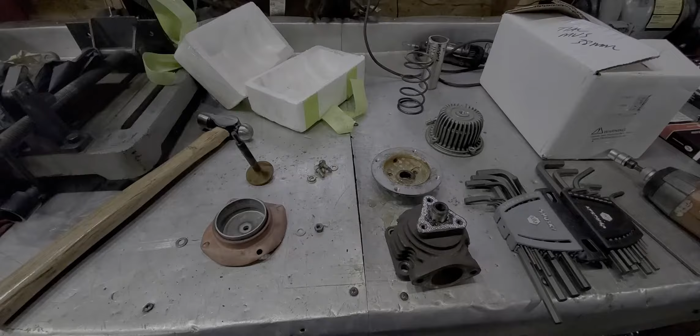Okay, guys, update time. Well, you know, as with any of these kinds of projects, things are going to come up. You think you're on a roll, you think you're about to really get rolling, and you're almost there, and pow, there's something. So, as most of you may know, when your car's running, if you watch at the back of your car, you'll see drops of water.

Some of you might even have noticed how there's a hole drilled into your stock muffler, and that's there to drip out condensate that happens when you first start your car. Now, as your exhaust heats up, that condensate becomes less and less, and of course, it's gone. But the hole's there to keep the water from corroding and rusting and stuff like that. Well, with the rear mount turbo setup, you face that issue. However, it shouldn't be that big of an issue.

Okay, so in my case, though, I'm using a wastegate, an HKS original wastegate 38 millimeter from the kit that I put this on back when I went to Spring Hill, Tennessee in 1999 for the performance rally. So it's old per se. It didn't have a whole lot of usage on it. That's why I used it for this deal. My last turbo kit, that little T25, I was just using the internal wastegate with the actuator. But of course here, a little bit different animal.

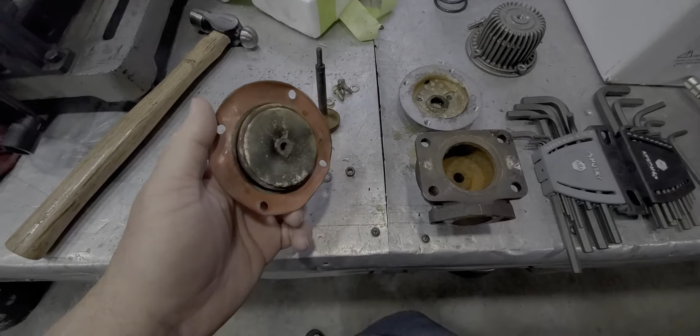There were a couple people that said, oh, yeah, until it heats up, you'll have some pass by, blow by, and stuff like that. But then when the valve gets hot, it'll expand and seal it off. Well, after it got warmed up, I had my son get in there and rev the engine, and the flow through there is as if there's no seal. So I was going to pull the valve, take a look at it. A lot of times what'll happen is these things will just seep by. You got to pull these things apart and check the diaphragm and all that.

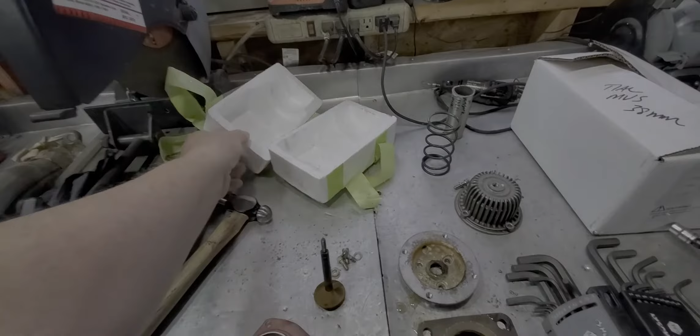And I had purchased a Chinese wastegate, and the only reason I did that, I didn't even intend to use it. I was going to use this one, but I needed the flange out of there that bolts up to this flange, and it has the ring on it, that cup that sits on it. And so I believe what's ended up here is I've once again been bitten by Chinese crap.

So if you folks are Chinese watching this and you got any relatives in the business over there in China making this stuff, man, tell them to take just a bit more time and a little bit more pride in their work and make something that works. I mean, it can't be that much more expensive. Some of these valves and stuff look identical. You really got to spend some time to figure out what's fake or not.

So I just don't get how you can commit that much time to making something, the production process, and it not just be right. Because in the end, word gets out, videos like this time and time again are going to expose it, and you can offer a $60 wastegate. Nobody's going to buy it. Over time, you just get burnt so many times and you waste time, and in some instances you may hurt your motor on some parts that they have.

But anyway, I'm not going to beat up on the Chinese. I actually love Asian people, love Asian culture, and at one time wanted to learn Chinese. I think it's a beautiful language. But anyway, so much for that.

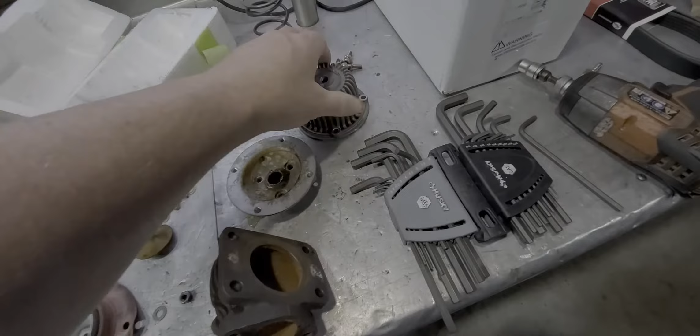This port right here, the bottom port, is the one that I had hooked up. When I took it off, water literally came jetting out. And after I unbolted this thing from the flange and turned it over, again, water just comes pouring out of there. That rusty water. As a matter of fact, when I just disassembled this, all this water came out of here still, even though I thought I had gotten it all out. And you can see the moisture inside there.

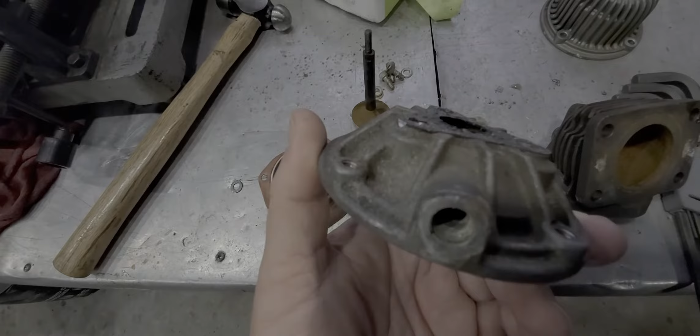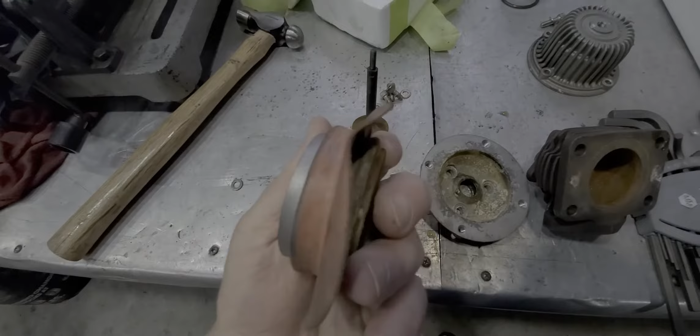I'm looking in here, and I don't see any kind of seal on here. So moisture gets inside there. If it can get inside there, it's going to get in that port right there. That's where the air would get in at. Air comes up through here, pushes up underneath here, and of course the spring is in here, and it has the hat compressed down onto it, and this lifts off the seat that's here, and that's how you get your wastegate to open and vent.

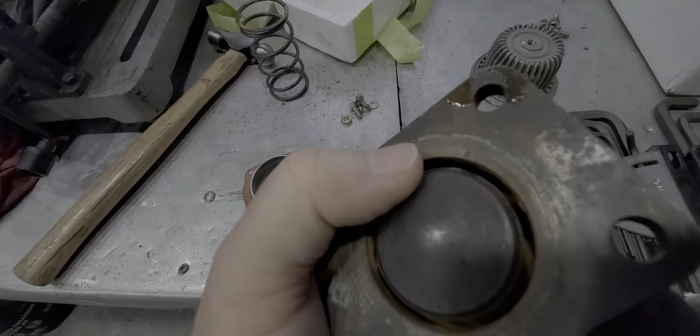So in the end, with that being full of water, that's not good. And plus, the main problem was this thing was not sealing up inside here. When it came closed like this, see the gap in here? That gap is filled by that ring from the flange that I bought. And so it's just not sealing right. So it's passing by.

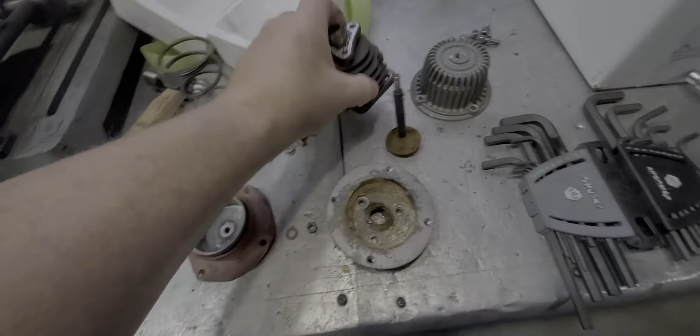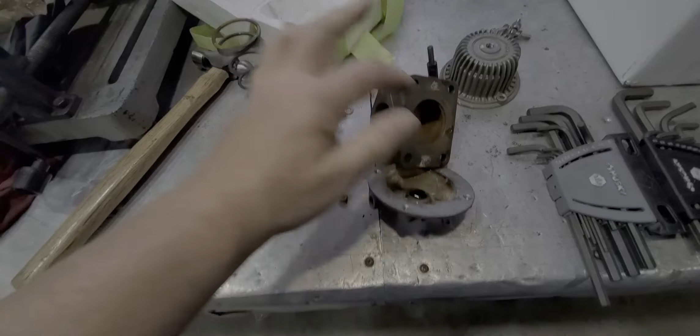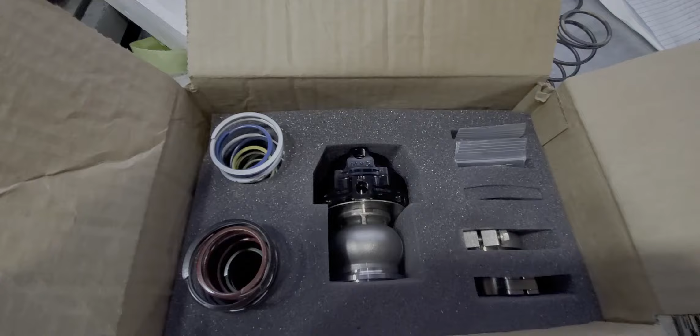That ain't gonna work. I seriously doubt that the water failed this. The water got inside here, and you can see it's all rusted inside here. The water got inside here because this thing wasn't sealing. Had that water not got inside here, it wouldn't have passed through here to get into here. So, need a new wastegate. What do you do? Well, you end up buying a new wastegate.

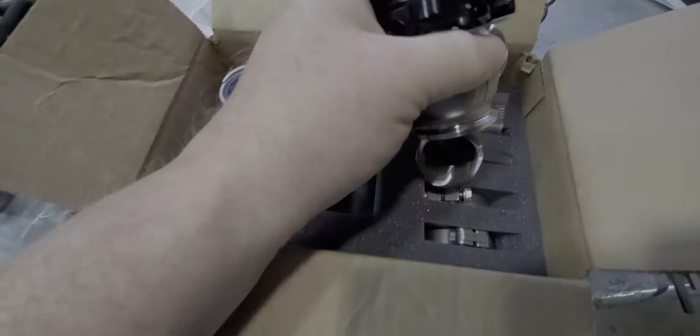So this time around, HKS, like I said, outside of using internal wastegates and the diaphragms for the actuators, that other one is the only one I had really used. And Tial is a great company, but again, like my video on blow-off valves, that HKS blow-off valve, there's so many fakes out there, and they look so real.

And again, I'm going to rant on the Chinese again. You sorry suckers, have some integrity, some pride in what you do. If you're going to steal something from somebody, make it better or at least the same. How cheesy you people are for doing this. But anyway, I say you people and I say Chinese, but obviously if you don't make parts, if you don't do stuff like this, it doesn't pertain to you.

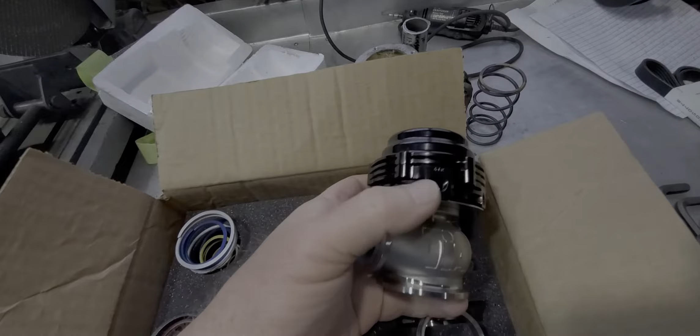But you've got to understand, this costs people, even though it's 60, 70, 80, 120 bucks. There are some people on the internet that run speed shops that will sell these things for $200, and you really think because you're paying the money you're getting a real one, and you get one of those fake pieces of junk. It's really flooded the market with trash.

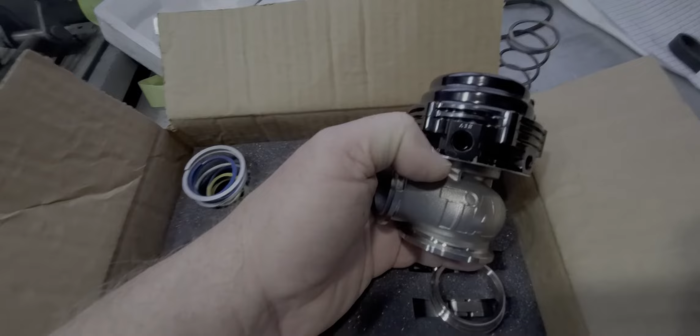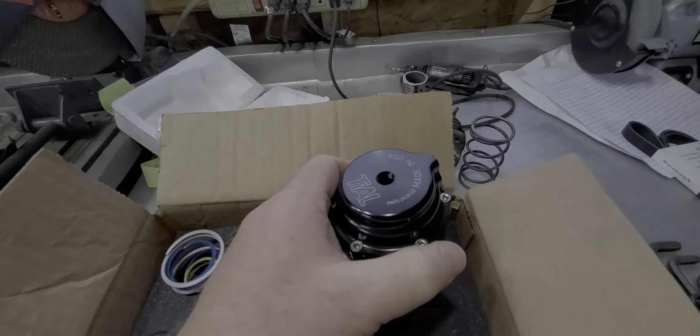So it's just frustrating. Out of an abundance of caution, I had to go online, looked at YouTube video after YouTube video, and found a young lady who's into racing, and she did an excellent job pointing out all the keys that you could look at to determine whether it was fake or not. I mean, they go to the hassle of making that. They put all the ports where they need to be. It's so jacked up how close they try to make these things.

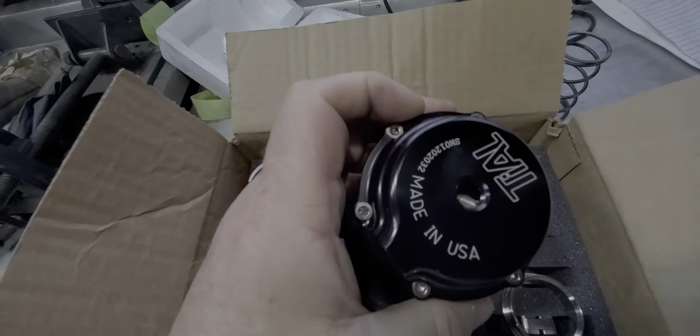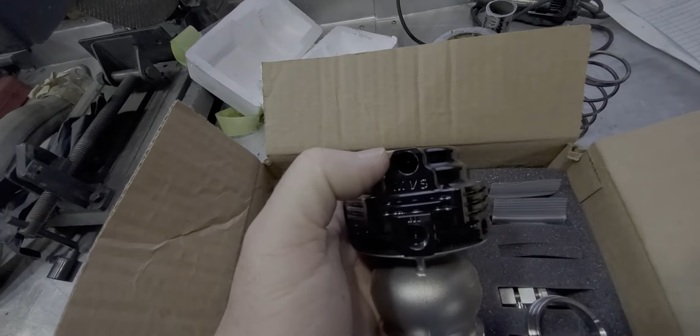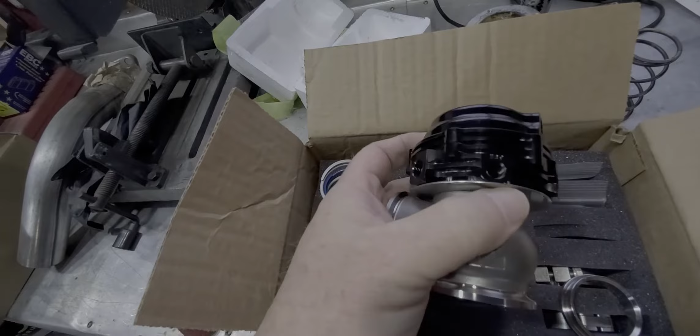But anyway, there's a few key things that you can see right here. This port right here, most of them come down just straight. This has like a hump shoulder on either side here. Each one of these has writing inscribed on all the ports. This one, if you wanted to, you could run coolant through here, which they said for most applications you don't need to do. Race application, yeah, but not street.

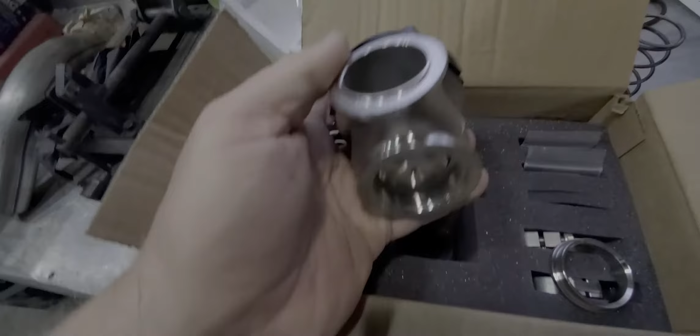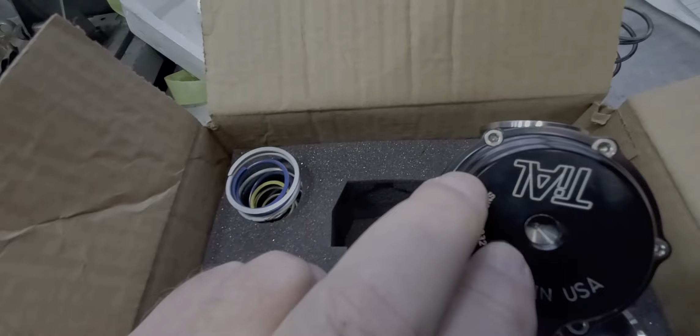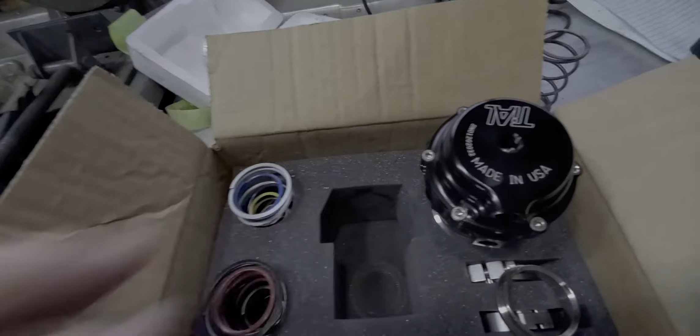This portion here, the way that it's shaped, it's got that flat on it with a hole in the middle. Inside here, if I cared to take this thing apart, there's a button underneath this cap in the center. It has a rounded dome top with a notch in it. You can see that part that I'm talking about inside here. You just can't see the rounded dome portion. It's got like a notch in it. The other ones don't. So I'm not going to bore you with all that stuff, but just do your due diligence and take a few extra steps.

This is from jegs.com, and here's the funny part. Jegs.com and all their pictures, because this is a real key right here in determining whether it's a fake or not. As it stands right now, hell, the Chinese may be watching those same videos and change their game. You never know. But for right now, all of Jegs' pictures had the picture facing this way. So you can see the top portion of this, but you can't see the part that's important.

And it looked like file photos that were pulled right off of eBay. And so, yes, you did see this, made in USA Tial. So I was apprehensive that, yeah, I was going to get screwed, but it's from Jegs. They would take it back, no problem, and maybe just do some feedback. They'd stop carrying them or do their diligence on their side to make sure they didn't buy junk. But anyway, I got it from jegs.com.

I think these normally go every day for like $305. For whatever reason, Jegs was having a sale the day I bought this one, and it was $50 less. I walked out with this one for $250. And it was black. They didn't offer it in any other colors. Oh, I'm sorry, they did offer it, but it was more. So the black, maybe nobody wants them. They're not pretty enough or shiny. But anyway, I got this.

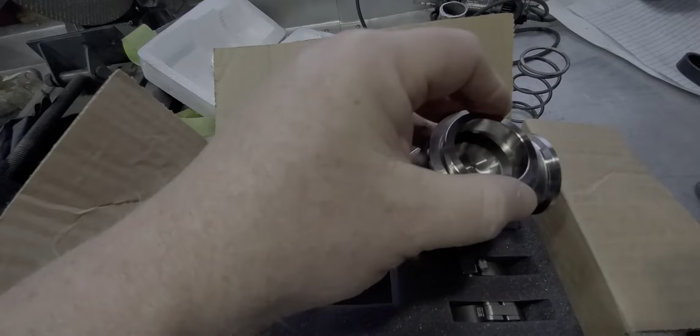Now I think you can get this, and it may be a little bit cheaper, but it's only going to come with this with maybe a couple springs. This comes with this all-important seat, which is what was the issue with the other one. A good quality piece. Of course, that's going to seal up in here. Nice and tight fit. Obviously you don't weld it inside there. It sits up just enough above that lip, so when you set it, it actually makes the other side of these V-band clamps.

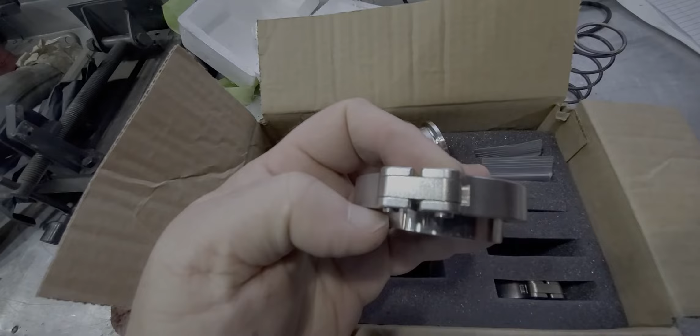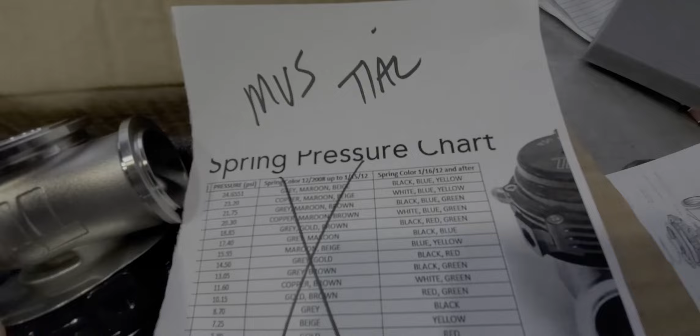Okay, the fake ones also have real crummy, cheesy V-band clamps. These are good quality ones. It comes with all the springs that you need for the varying spring pressures. Now, I did have to go online and hunt for the guide. This is an MVS, they call it. It is a 38 millimeter.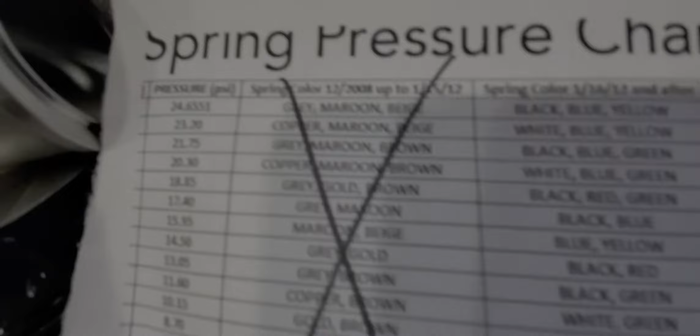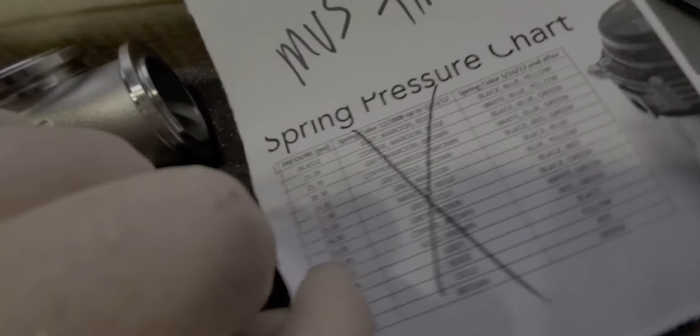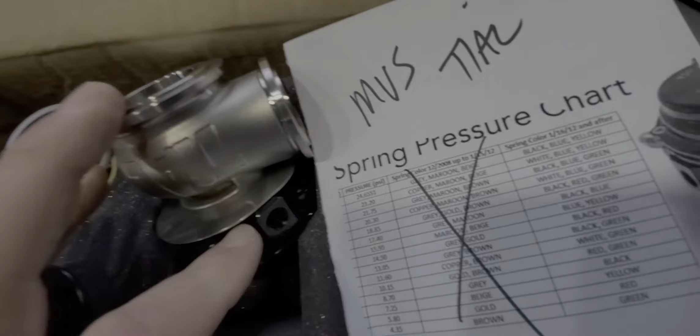But as you can see, it goes through and it tells you spring colors, 1/16/12 and after, and here's your pressure that you're wanting to run. It'll go as low as 4 psi and as high as 24. But I don't know if this was just a generic chart, because I can't imagine running 24 pounds of boost through a 38 mil. I mean, I don't know. I guess you could. It seems like it wouldn't be able to flow enough naturally. So anyway, I did that.

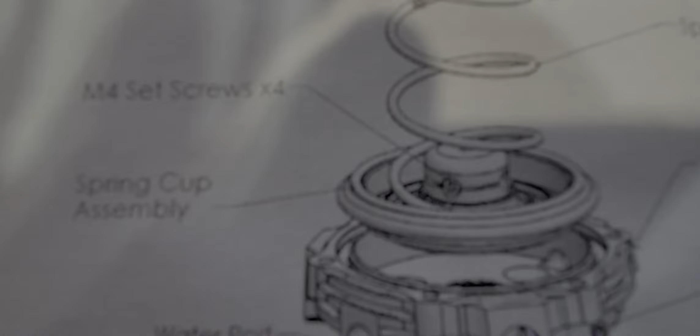It does come with this, and of course it's just an exploded view. While we're at it, do you see that button right there where it says spring cup assembly? That button right in the center of the spring, that's how that button should look. Apparently that's something that the Chinese just don't know how to do. But it's good because you can open yours up if there's a question of whether it's a fake or not, and check yours to see if it's right.

But anyway, exploded view here of it, MVR, MVS instructions. And back here, in case you don't know how to hook it up, there's a little drawing here for you to reference to figure it out. And it's just my Jegs receipt here, or my packing slip. But anyway, going with the Tial. I'll have this put on here probably by end of today.

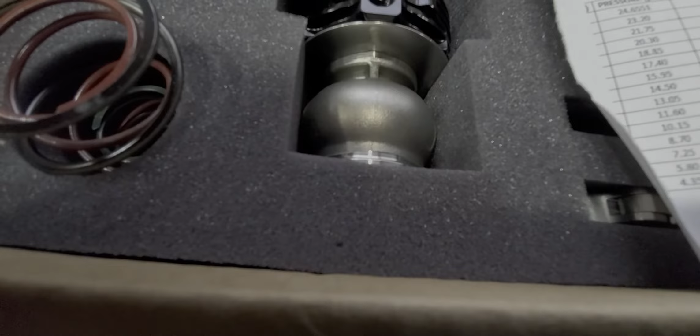And I'm thinking about using, from the start I had only wanted to run about maybe max 14 pounds because the head gasket on this build is just a stock head gasket. The metal head gasket, at the time I built this particular engine, I didn't have one available to me. Obviously later I'd hoped to do that. I'm in talks with Unichip right now for several things, and I'll update you on that here in just a second.

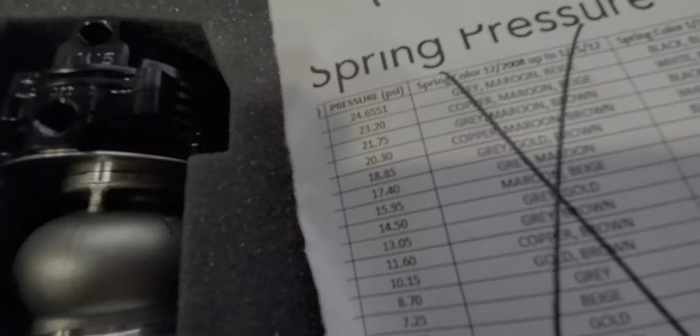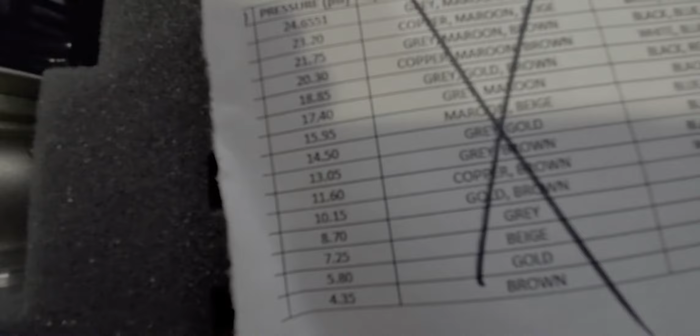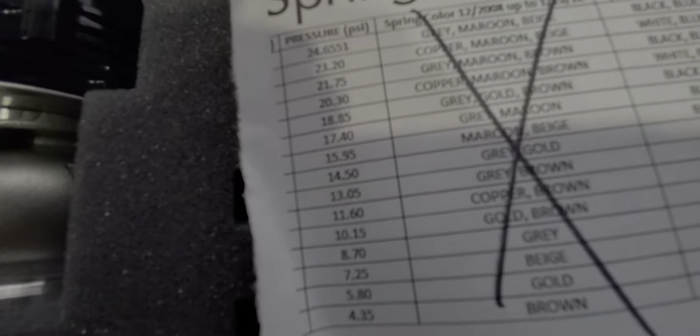But I'm just going to run 14 pounds, and so if that's the case, then I may just go 7 or 10, and then use the Grimspeed boost controller to get me up higher. I'm not sure what's the better way to do that. I don't know if you figure you're going to run 11 pounds, 12 pounds, to just put in the 11 pound or 13 pound spring and let it vent on its own, because as you know, these gates start to open before you hit that max boost, unless you use the top port on the wastegate.

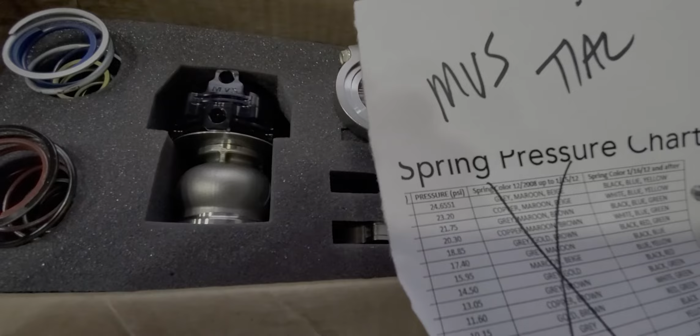So I'll figure that out, and I'm gonna go over all this stuff when I get it done and get this thing out and running, and tell you what I did and how the response is. And I may ultimately go, I have an electronic boost controller from way back. I mean, it's brand new in the box. I may use that, but the Unichip, I'll talk to you about that here in a second.

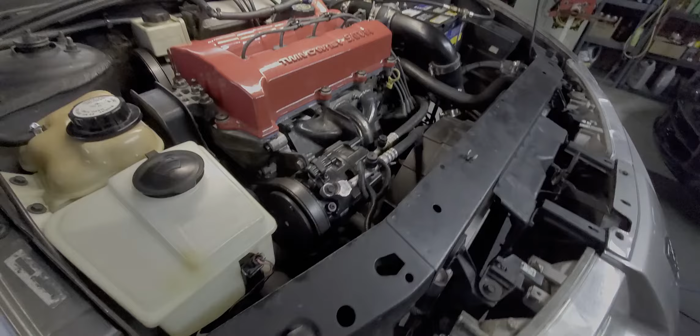But first, little quick thing here we're going to do. The power steering pump's not working. I have an extra one here. I just need to swap it out. I'll probably end up doing that today. So when I do that though, obviously you take the belt off.

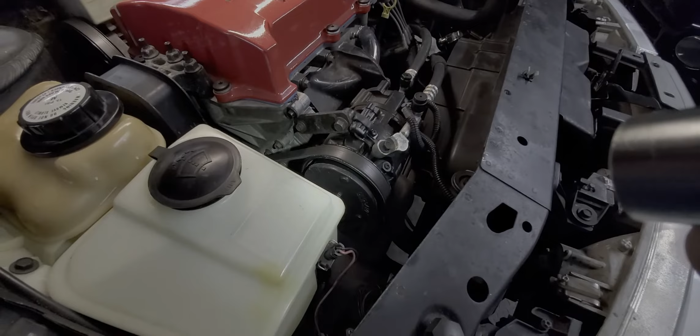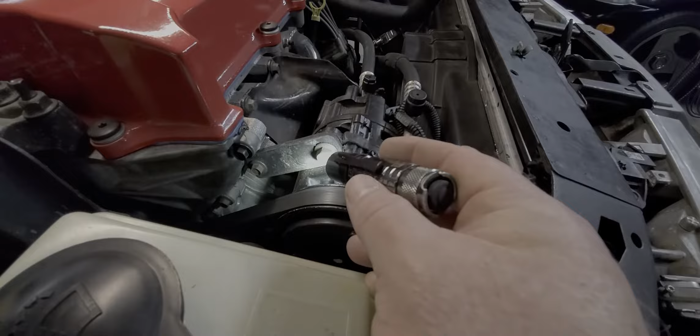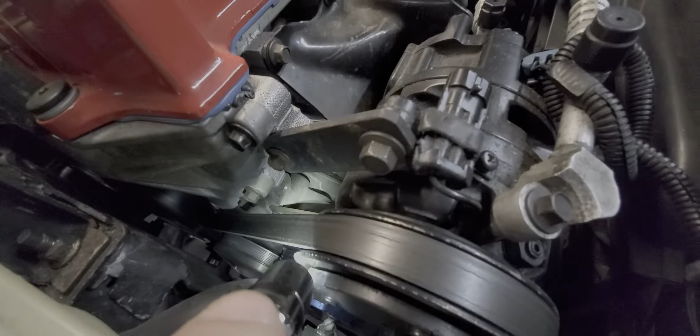This belt's chirping quite a bit when I start it up. When I had the other turbo kit up here, the way the manifold was and so forth, I had to kind of come up with a different mounting system. So the stock flange or the stock bracket, I had to replace with this. And so this is just a bracket that goes from here to here. And then there's another one that I'll point the light at, and you can see it. It's the bottom one. I don't know if you can see that or not, but it goes from there up to the compressor. So that replaces the stock bracket that was here.

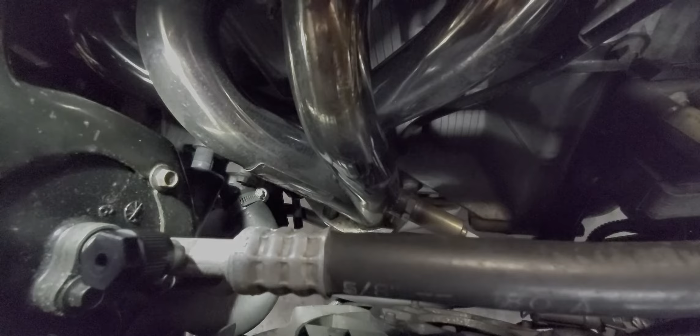I use the factory bracket here, but where it secures to the block down here, you can see, where is she at here? Let me get a camera the best way I can get in there. But I've got some bushings down in there that you may not be able to see. There they are, right there. In between the bracket and the block, there's a couple bushings on both sides, only on the bottom. Up here on the top, it bolts directly to the head.

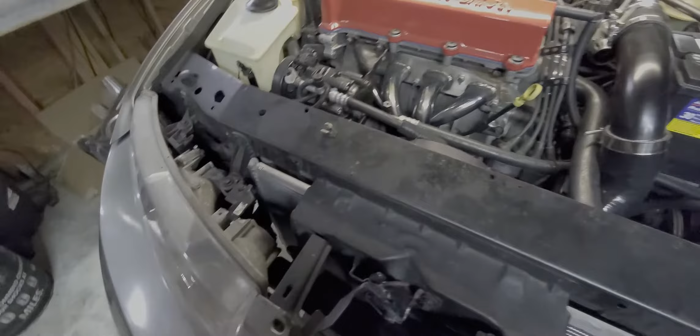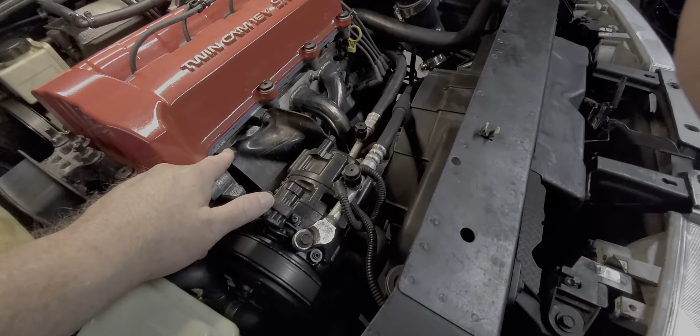So that there enabled me to gap or space this bracket here away from my turbo kit that I had up here. And all I had to do at that point was find the appropriate length belt. It actually required me to buy a 6-rib, and I cut the 6th rib off. But back then I had this one also bushinged, and so that pushed the compressor even further out. So that's why I had to use the 6-rib. Well, they had a 5-rib that was long enough, but just a hair too long. So on startups, it'll chirp until it gets hot, and then it'll warm up and expand and stop.

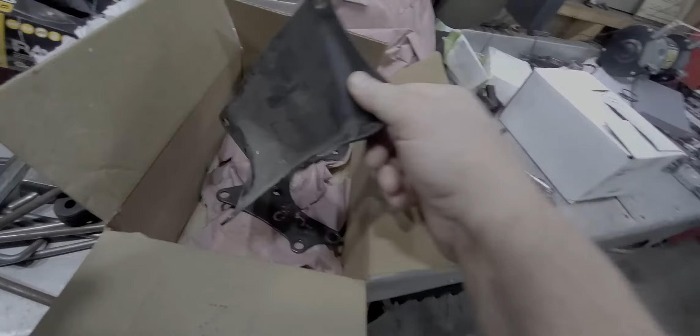So now that this thing is rear mount, I don't need this bracket, this bracket space. And so I'll go ahead and pull it off. But wouldn't you know, I don't know where my brackets are at, so I had to get some off of eBay. And good news is these aren't Chinese. Now I didn't need this one, but just in case in the future I went ahead and got it. But this is the one that I needed. So once I put this one back on, I'll be able to put the stock belt on, which I have. And in case you want a quick part number for it, stock belt is a K050778.

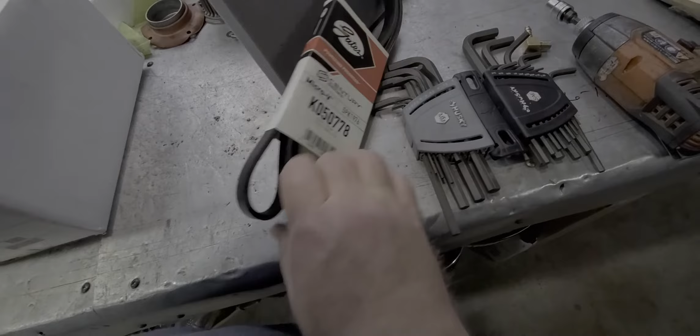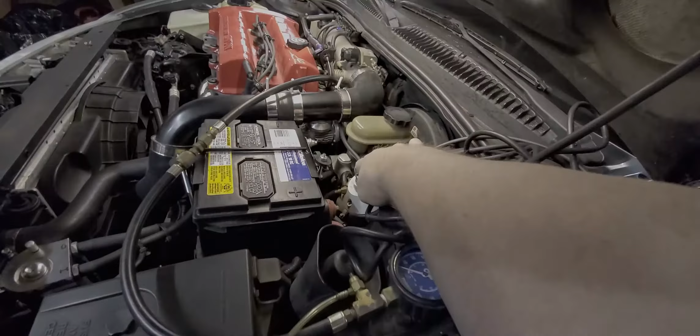That's a quick update, just to let you know what's stymieing progress right now. So hopefully I'll get these things hammered out pretty quick, and then the goal is to get it over to the little school parking lot over here and play with tuning this fuel pressure regulator, because this is what I'm going to use to initially drive it around and break it in while I'm doing the final things with the Unichip to get it set up to be installed. The Unichip's been posing a small issue because the wiring for it to identify like crank signal for the timing and all that stuff, they want you to use an oscilloscope. You have to locate 12 volts, but it isn't what you think. No time to explain that now. But those are the only two hiccups I see to installing this thing.

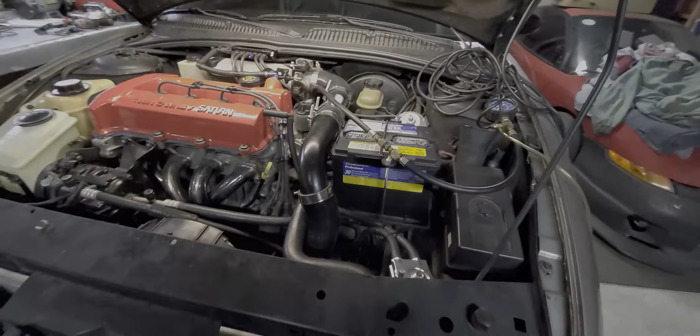The tuning process, I've been going over the manual quite a bit. It looks, man, I'm excited, actually. It's very easy to understand. And once I get really up on it, if anybody's interested in it and you're close by, I'll install it for you and we can even do a street tune on it. And then the final tune, you can go and get it tuned at a regular dyno place. But there's another market that I'm interested in getting into, and I'm not going to say anything about that yet. But that one will probably be a little bit more lucrative.

But anyway, for those that want it, I'll be here for the Saturns, and there's just been some changes in the Unichip US vendor, and I haven't been able to contact him. Turns out that guy retired. Someone else has stepped in, so I'm getting up to speed with them. But anyway, I hope to be able to offer you guys, but then also this other make. And I think in order to be a Unichip dealer, you can't just limit yourself to 2 makes of cars. So I don't know if I'll be a dealer or maybe just a seller.

Maybe I can install it, especially if you get really good at doing it on 2 makes of cars. It'll go extra fast, precise. There won't be any downtime because automatically you know which wires to tap into. So there may be something there, but if not, it was for myself in the beginning anyway, and that's what it'll be. But another update on that rear exhaust, getting that wastegate installed, and I'll update you again shortly.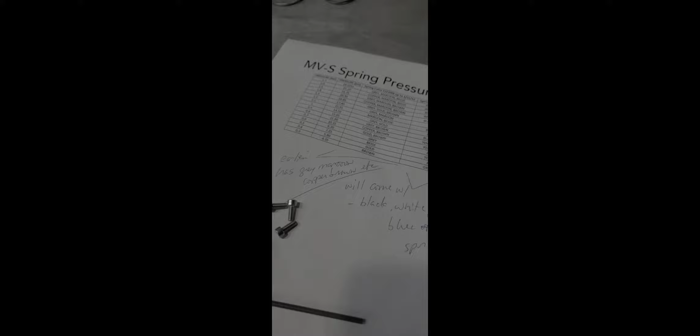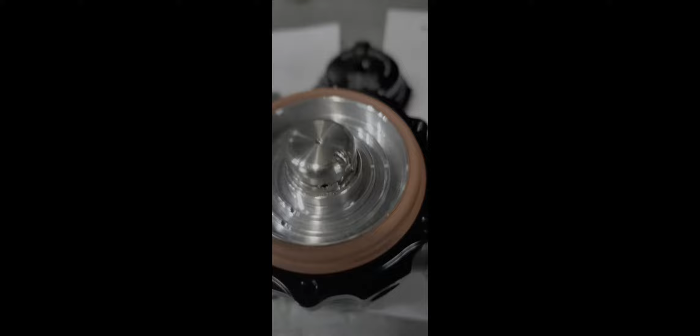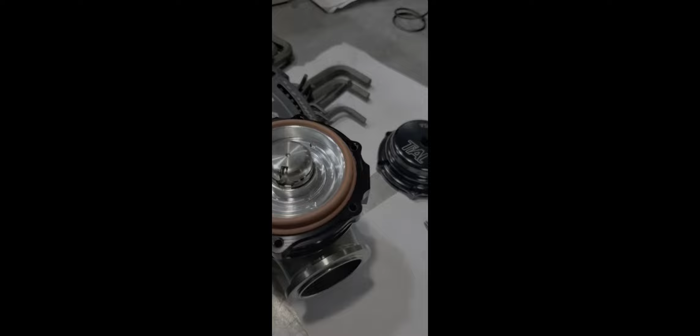Okay, so here I am. Just want to give you a little bit more insight on the real wastegate, that part I was talking about. See how that button is curved at the top, and you have that little divot right here in it. The fake ones don't have that, and of course if you look on the side too, you've got some set screws here, and on this side as well. So that's one sure way that you can determine if it's fake or real.

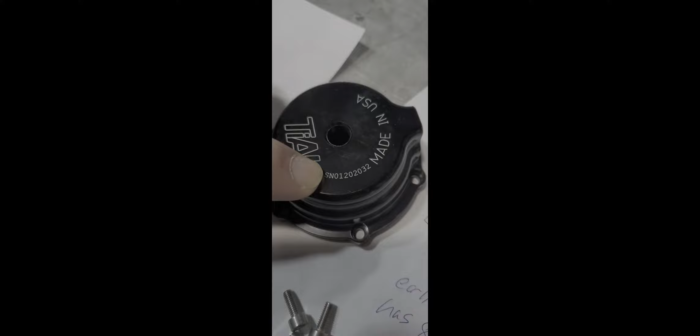This number here on the top is the serial number. That can help you know what build date. Tial 38 millimeter. Now this is the MVS one. There's the MVR, which my understanding is the difference is the MVR is larger, 44 millimeter, and this one's 38 millimeter. The color chart, like I was telling you, so this one here is for 11612 and after.

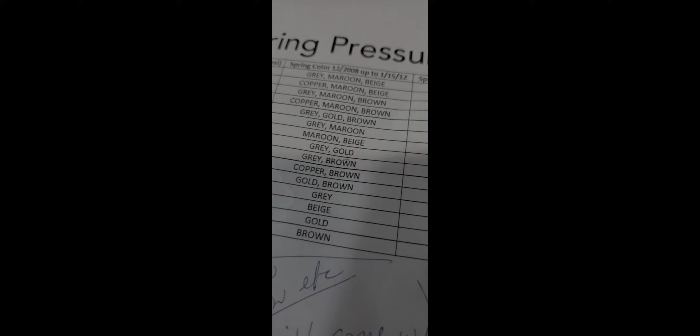So one way you can know for sure if you can't read the serial number is look at the color springs: black, blue, yellow. You see a black in there, a red, a white towards the bottom down here, and so forth. But then look over here on the other ones. You got gray, maroon, beige, copper, maroon, beige, all the way down to golden brown.

Well, the kit that I bought has all these spring colors with it. It comes with every one of them. And so in my kit, I got red, green, blue, white, yellow, and black. So just by looking at the colors of the springs, not knowing what the serial number reads, you can tell by the spring colors alone that this is a 11612 and after build.

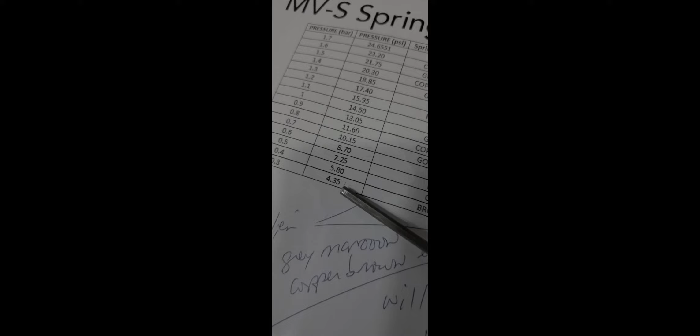So I'm going to put it at 10 pounds. And if you look up here, this is the pressure in bar, that's the pressure in PSI. And it goes all the way up to 24 pounds right there. And you can run as little as 4. So I'm going to put it at 10. And then, like I said, my goal is 12 to 14. I'll run it off 10 up to the gate just off the springs alone.

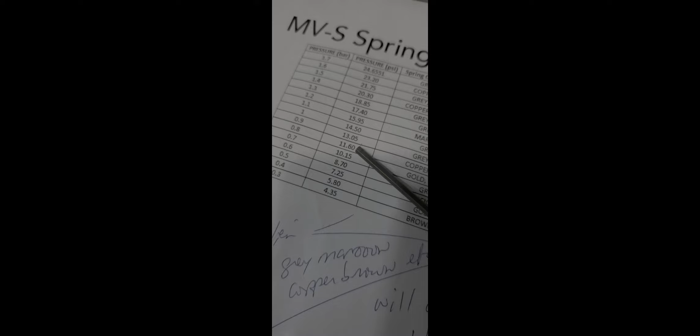And then I'll use the boost controller to control up to 12 and so forth, because you may only see maybe about 9 here. I'd go 11, because like I said, 12 is where I'm looking, 13, 14, somewhere in there. But anyway, one of these two I'm going to use, and that'll give me the additional few PSI to play with the boost controller. All right, so just a little bit more on that.

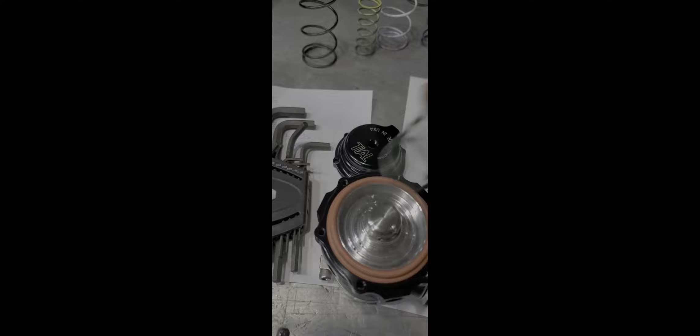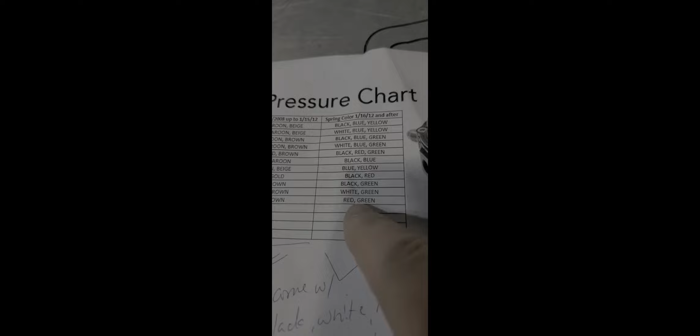And the good news here, the build of this thing, the springs have these little grooves in them that mate perfectly with the diameter of the springs. So this one goes here, and this one goes on the outside of it. If I was using a larger spring, it would go on the outside like that. But for the PSI that I'm going to use, 10.15, never mind. Red and green right there. And that's the colors I'm using.

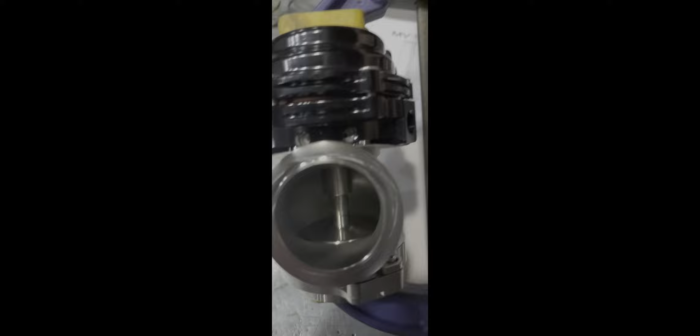And so before I leave, I want to give you an idea how well this works. You just basically center it on there, and as you're going down, don't try to squeeze it together with this thing. Get close enough to where you can start your bolts in there, and then try to get this flange, let's see here, I get my finger in there, even all the way around, because then you know that this thing isn't sitting cockeyed and it's not going to pinch that diaphragm in there.

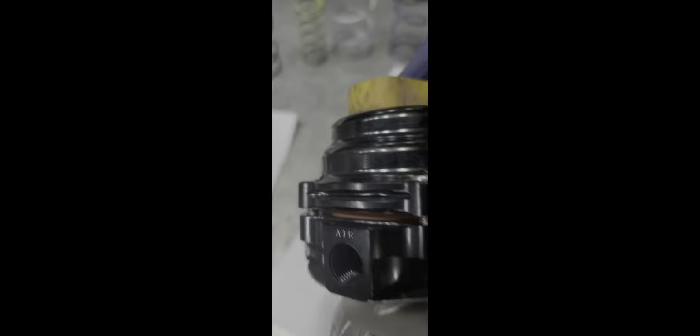I've got them all pretty much started loosely, and then what you're going to want to do is tighten them down a little bit at a time in a star pattern, so that one side feeds down, and then you go over to the opposite side and feed it down a little bit, then go to the opposite side of that and feed it down a little bit, and so forth until you get this thing cinched down tight.

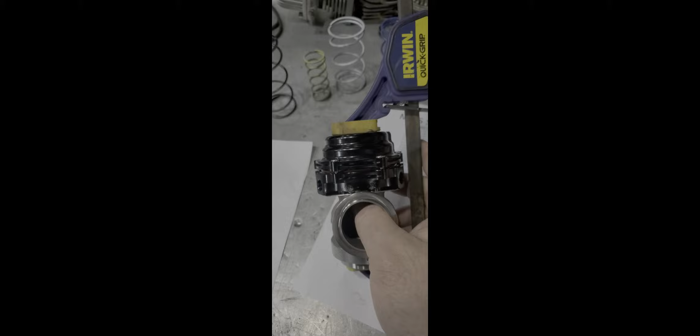And always watch that gap right there, because this gap shouldn't be almost closed off where on this side it's got a lot of room, because then you stand the chance to pinch that diaphragm. You certainly don't want to do that. But just a hair bit more guidance on that. But this works really well if you don't have a vise. Like I said, they're stupid cheap at Home Depot or Lowe's, wherever.